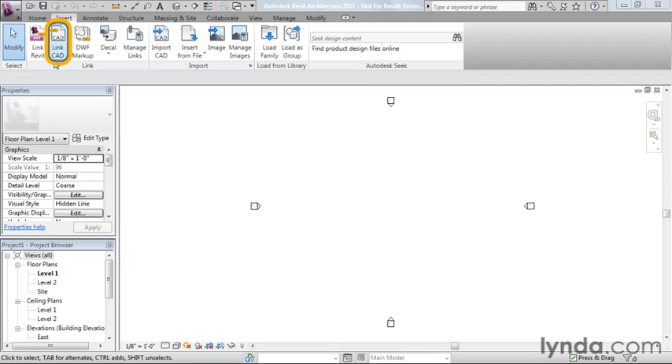So I'm here in a blank empty file started with the default template. I'm going to click the Link CAD button here on the Insert tab. Now there actually are two ways to bring CAD data in, Link CAD and Import CAD. We're really going to want to choose Link CAD if we're sharing data with somebody else in the project team and we have any suspicion that that person is going to send us an updated file at some later date in the project.

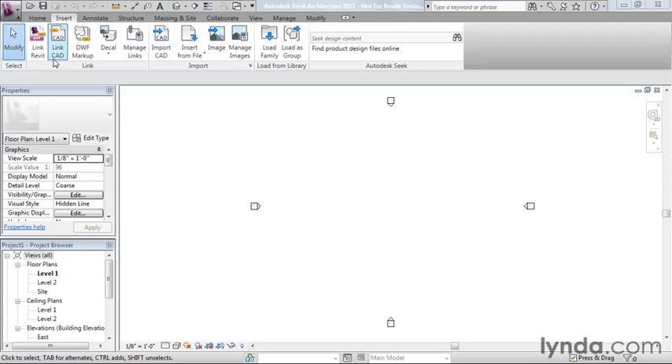When we do a link, we'll later be able to go into the link dialog and actually reload the file should there be a change to the file. If you do import, there is no link and you would have to delete the file and import it all over again. So link is usually a little bit more flexible when you're working with an extended project team. So I'm going to go ahead and click that button.

I'm going to browse out to the Chapter 5 folder, and there are a few AutoCAD files provided in this folder. And I'm going to select this one here called AutoCAD Floor Plan. There are a variety of settings down at the bottom of the dialog, and I'd like to walk through a couple of them here. And let's start with the current view only.

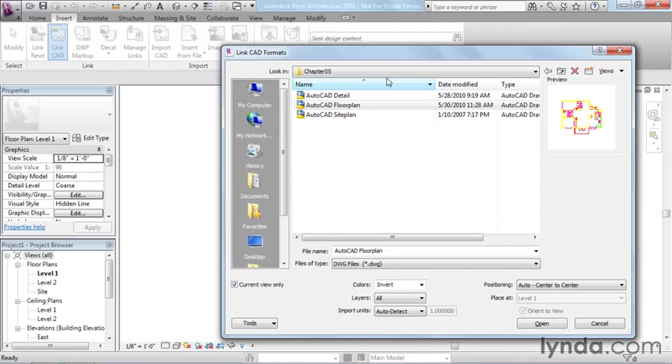If you uncheck this, the file will show up everywhere throughout the model. In other words, Revit will treat that like any other model data, and it will show in every view. If you check the box, it will only show the CAD file in the view to which you import it. So in my case, if I move this out of the way and look in the background here, we're currently in level 1 floor plan. So this file that I'm importing with this checkbox chosen will only come into level 1 floor plan.

Chances are if you're bringing in a floor plan, it's because somebody on the project team did some early design work in AutoCAD. They either weren't familiar with Revit or they didn't want to use Revit for whatever reason, or it was an old file from years ago. And you probably don't want the first floor plan to show on the second floor and the third floor and the fourth floor. So checking this box is usually a pretty good option when you're bringing in floor plans.

So let's move over to some of the other settings here. Colors. AutoCAD is typically on a black background. Revit, as we've seen throughout the training series, is typically on a white background. So the color choices that an AutoCAD user typically relies on are often very bright primary colors and don't look so good on a white background. So we have an option here to invert the colors, make them a little easier to read on a white background, or we can even force the colors to black and white only.

Now again, depending on the kind of data, I choose different things here. I almost never choose preserve. I usually choose between either invert or black and white. If it's a plan and I'm planning to trace over it, which is what I'm going to do in this exercise, I'm going to use invert. If it's a detail and I'm adding it to the file and I'm going to just print it right along with my set, I'm going to choose black and white. I'll have an example of that later.

Layers. All CAD files are organized into layers. So this just simply tells Revit which layers you're interested in bringing in, and you do have some choices where you could bring in only the visible ones, or you can load up a dialog and specify which layers you want. I'm not sure which layers I want, so I'm going to bring them all in just to play it safe. Positioning. There are lots of choices here.

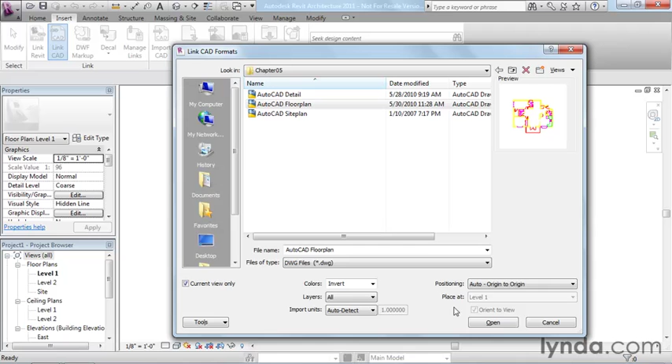In a later movie in this training series, we'll talk about shared coordinates. And manual options are probably not a good choice for a floor plan, but when we bring in a detail, those might be better choices. So I'm going to try origin to origin, see what that gives me. Sometimes even when I choose that, Revit will complain and say, sorry, I can't do that, I'm going to give you center to center. So let's just see what we get. I'm going to go ahead here and click open.

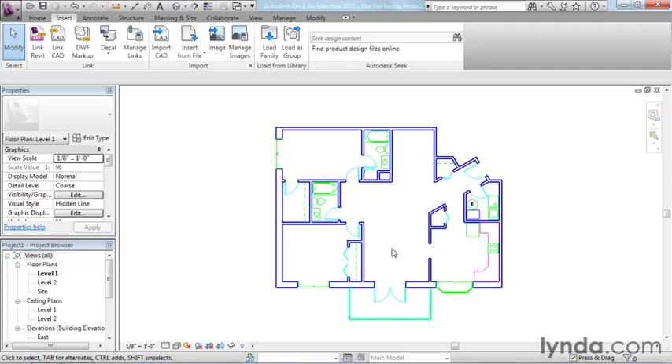And there's the file. Now, in this case, origin to origin worked pretty well because the file was pretty compact. If I go ahead and zoom a region right around here, you can actually see that this file is just another version of the condo layout that we've been working on. And I brought it in color on purpose because, again, the scenario that I'm assuming here is that a designer worked in AutoCAD because they weren't familiar with Revit, so they did the quick layout in AutoCAD and they gave the file to me. Now my job is to quote-unquote Revitize this AutoCAD file. So the easiest way to do that is going to be to trace over it with Revit tools.

Now, if I go to the Home tab and click on the Wall tool, and for this example, I'm going to stick with just simple generic walls. So I'll just do a generic 5-inch wall. Revit does a really neat thing when it comes to CAD files. If we were to open that CAD file in AutoCAD, we would find that those two blue lines are just two parallel lines. They're not walls at all. AutoCAD doesn't have walls. It just has lines. But here in Revit, Revit can actually find the center between those two walls, and I can snap directly to those points.

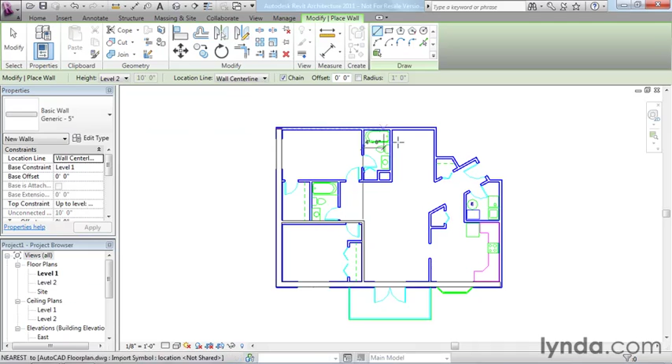Now, the reason I like doing the colors is because, as you can see, as I trace over this, it starts to cover up the CAD file underneath. And so I kind of know where I've been and how much work I still need to do. And I'm a little off right there. So I probably should zoom in just a touch to get a little bit more accurate. But again, if I pay attention and I get the center line, I'm going to get a much cleaner trace. I'm going to have a lot less rework to do.

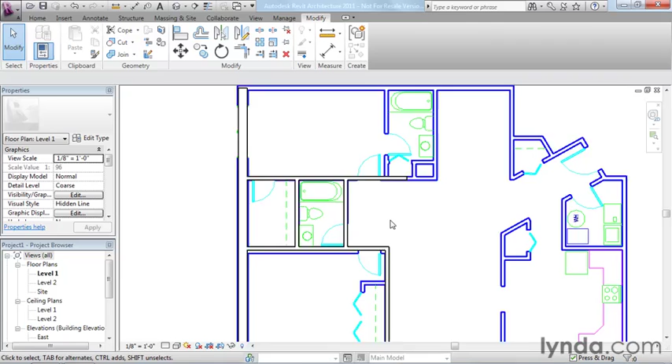Now you notice how I'm kind of being a little sloppy at the ends here. If you recall the Modifying Walls movie, we looked at tools like trim and extend and so forth, and that's really going to be a much easier way to clean up things like this. So basically at that point it's more of the same. So I won't go through the whole process of tracing over the whole plan, but you can start to see what's happening here. As I begin to trace over the colored walls, the color will slowly disappear and the black and white Revit stuff will stay on top.

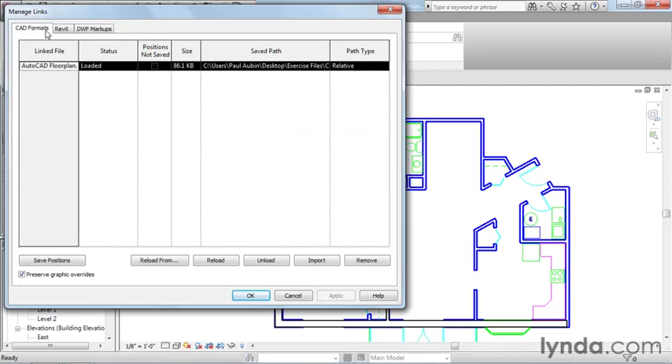And then at that point, when I'm done tracing over the file, I can go to the Insert tab again, click on the Manage Links tool, and the AutoCAD file will show here on the CAD Formats tab, and I can just simply unload the CAD file, and that will leave me with just the Revit geometry that's on top. Later, if my designer gives me an update, I can reload the CAD file, make adjustments, and then unload it again. In a simple nutshell, that's basically the process of bringing in a CAD file.

There's a variety of reasons why you might want to do that. I've painted a scenario here where you're bringing in something from a designer and you're tracing over it, but there are other reasons why you might bring in CAD files as well. But the process remains essentially the same regardless of what the end goal is.